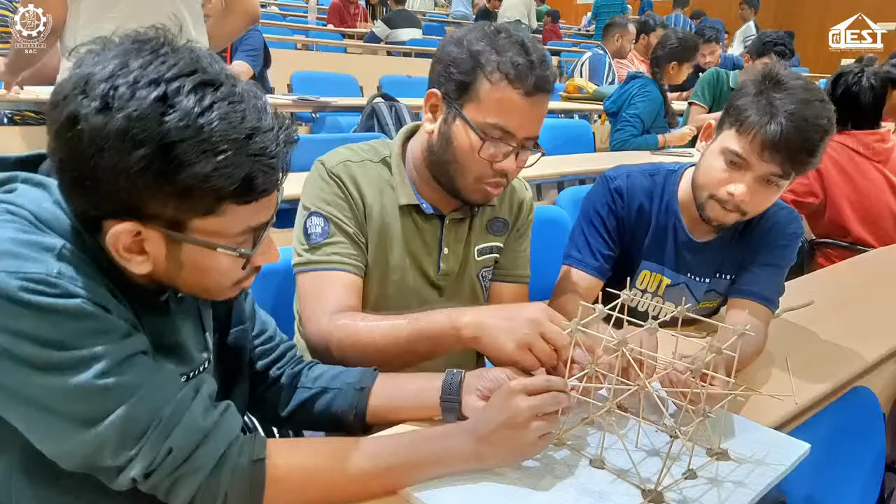Now let me introduce the guiding light of our club, the executive body of CEST. They aren't just leaders, they are compass, ever ready to navigate us through the challenges and victories that come our way. So let me introduce Mr. Bishwa Prakash Bahinipati, Vice President of CEST Club.

But our journey doesn't stop there. We present to you CIVI-NAR, an electrifying fusion of knowledge and connectivity. CIVI-NAR is not just an online webinar, it's a dynamic platform where the entire civil engineering community comes together. It's a stage where we dive deep into the most trailblazing topics of today and tomorrow, led by experts who have mastered in their respective domains.

As we carry forth our legacy, today's discussion delves deep into the intriguing topic, a digital based integrated approach for the preventive conservation of cultural heritage buildings. Before we embark on this journey, I would like to extend a warm welcome to our CEST Club advisor, Dr. Subhajit Mondal sir, who serves as an assistant professor in the Department of Civil Engineering at NIT Rourkela.

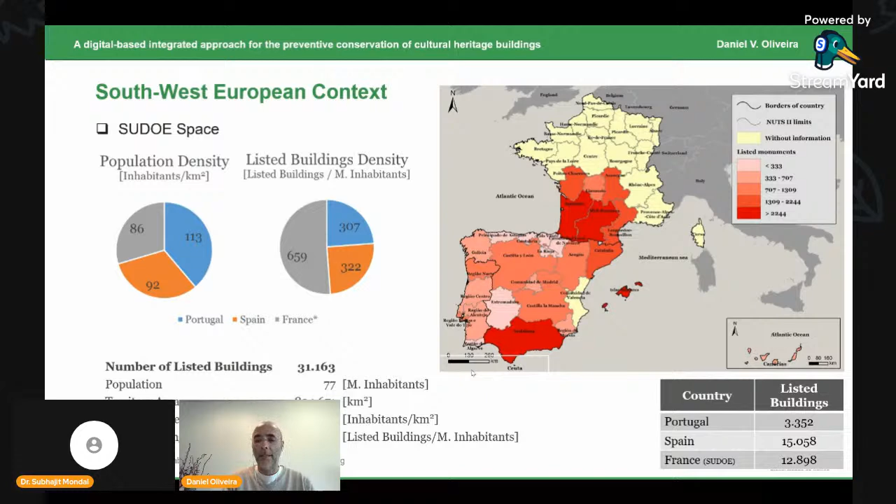So we built a consortium with 8 partners from different countries. We were the coordinators, and we worked on this project for 3 years. We call it the HeritageCare project - so we have to care for heritage. This was the message, and I will show you the main steps of the project.

My goal is to inspire you, so if this is a problem for your region, for your country, for your city, try to develop some kind of research activities that you can take further than we did. Take the good ideas and proceed with them, because this is really an important issue.

I just want to mention that we have partners from different sectors - this is really important. From the universities, research centers, the heritage managers from different countries, we have companies, private companies, and we have the owners of the buildings, like the church. They have a lot of buildings, especially churches, but with problems. And you have to understand that most of these owners do not have technical knowledge. For them, the conservation and preventive conservation and maintenance can be difficult because they don't have the technical knowledge - they don't know what they have to do when they suspect something can be a problem.

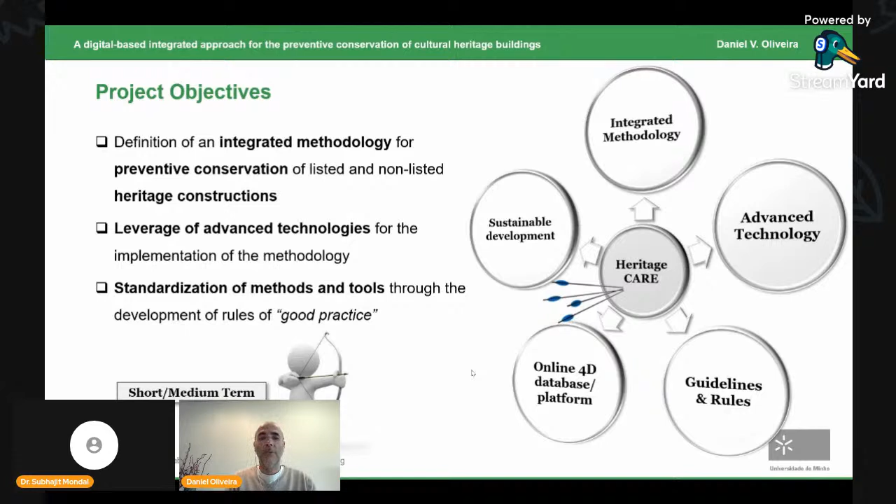This should be definitely integrated - you have to bring knowledge from different fields. And we have quite advanced technologies that should be used, should be considered to improve the quality of these tools. At the end, you should also define some rules of good practice so people can use it on a daily basis. This is really important - these were the goals of this project.

Of course, at the end, you also have to communicate to society - if we are researchers working at university, we have to communicate with society. Society needs to know what we are doing. We organized workshops and seminars to explain the purpose of our project and to explain that the things we are doing are important. We also organized a seminar at the end to train professionals on the use of these tools that I will show you.

You can develop fantastic tools, but if nobody understands them and cannot use them, they will not be used - it's useless. So you need to develop the tools so they are easy to use, and you should train people to use them. You need to put these things in your project.

How do you do this? We established 3 levels regarding the complexity, because you can do many things when you think about preventive conservation.

You can say, well, the basic thing is to do an inspection. So you go there, you check point by point, room by room, and then you write down a report with a damage survey.

This is nice, it's quite simple, and we've done this for several years now. But it's not enough, because if I go there and write a report, then if you go the following week, you will write a report different from mine, because we will be using different categorization of the damage.

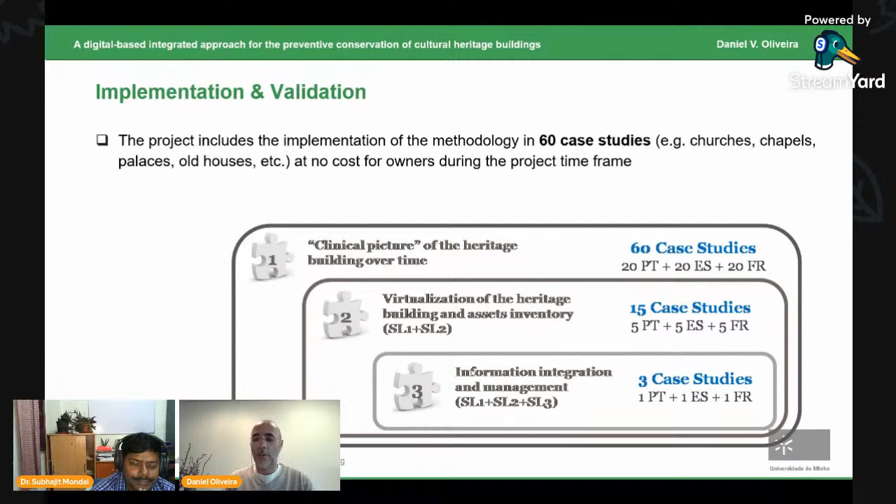And our most important case study was this palace that we have in Guimarães, nearby the University of Minho. So one of these days, if you come to the University of Minho in Guimarães, for sure you will visit this palace. This is a palace from the 15th century, and we put a lot of equipment here.

We did a lot of survey, laser scanning. So this was our case study. It was great because we had good collaboration with the owners, and we used this as our living lab, basically. Okay, so I will show you now.

What we did in the different service levels, the different levels of complexity. If you remember, level 1 was the simplest one. So you pay less if you want to think in terms of budget, so the cost is low.

You get the essential, basically. Then if you increase the cost, you get more, and of course you can get the maximum possible with the digital model. But then this is much more expensive, much more complex, and requires technicians with much more knowledge.

Okay, so level 1, our goal was in fact to have a very nice inspection report from the building. The goal was to identify the problems, the cause of the problems, why they are taking place, and then of course what to do to solve the problem. So we are really at the upstream part of this process. After this inspection, you have an architect, an engineer that will come and perform a design, or then the company, the contractor, that will solve the problem.

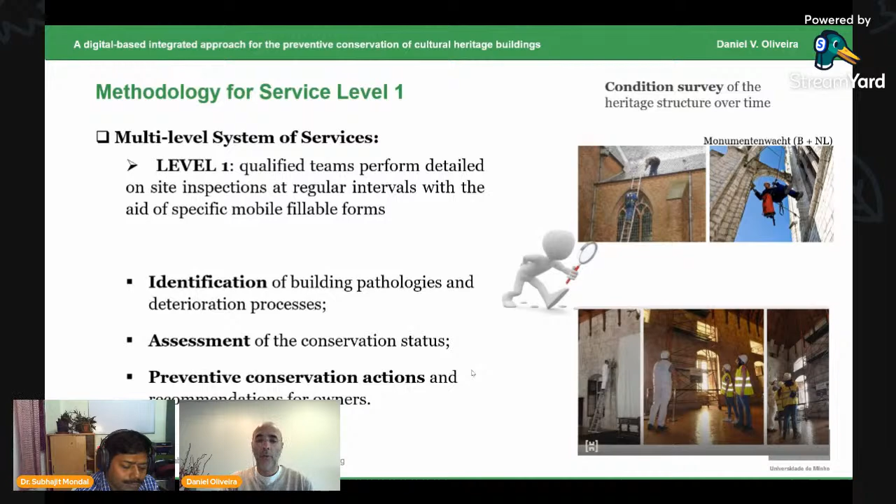So the goal was to have a nice report. Of course, for this you need a lot of things, I mean the equipment, I think I will skip this. I just want to comment that we performed our inspection using a tablet.

We started the first inspection in 2017, 2018, so six years ago already. Nowadays everybody has a tablet, but in those times it was not so common, though it was the minimum that you can do. You cannot take a sheet of paper and perform the inspection, this doesn't make any sense nowadays. That's why I was saying that we have to bring the technology to this.

And this is done offline, you don't have to be online for this. In the office, you can download all the information you need from the web platform to the tablet, and then in situ in the building you can use the tablet to fill in your inspection sheet form. You can fill it, take pictures, record audios, videos, whatever you think is necessary. Everything will be stored in the tablet, and then when you go back to the office you can upload all this information to the web platform.

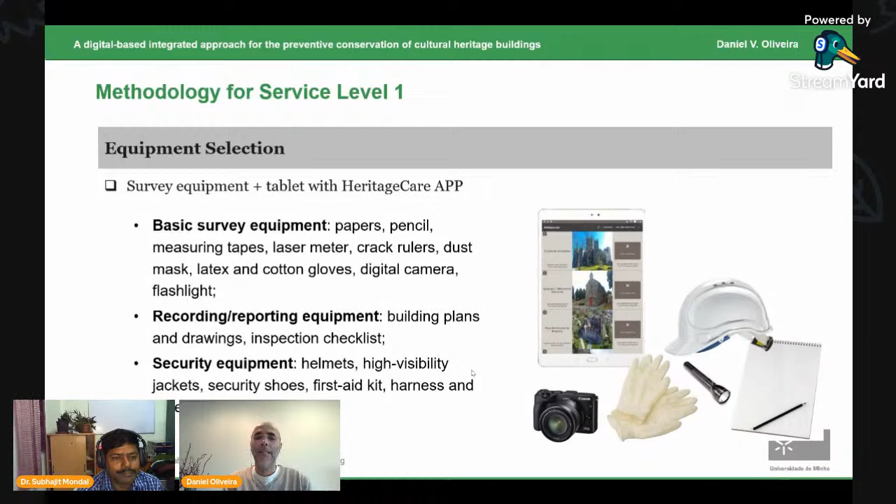So all this information will be recorded and associated to the inspection of the buildings. Everything that is information will be there, and you can access it anytime. This is the advantage of having everything integrated in a single platform. You can also produce damage maps.

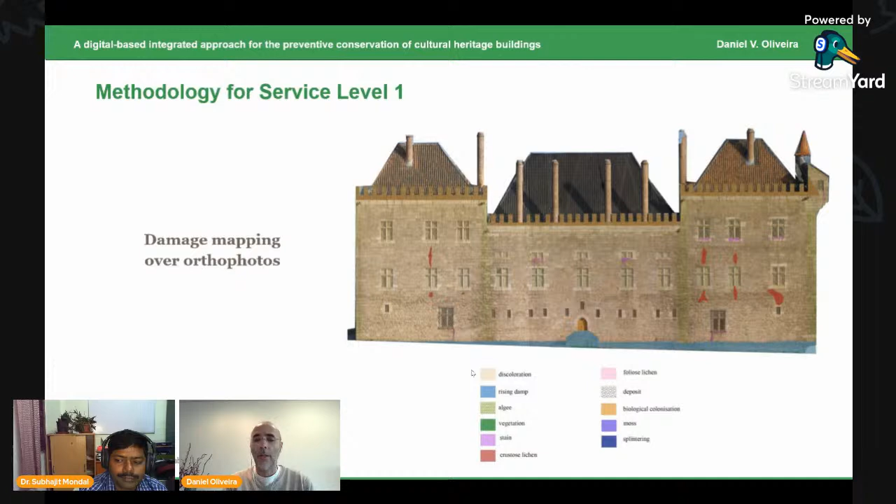This is really important. You have to define a category of damage categorizations, so everybody can use the same categorization. This is a major issue.

I just want to show how we did the inspection. So we start from the top to the bottom and from outside to inside, and we did this in all the 60 buildings, so we could not forget any point. In this case, we defined 11 categories, and you have to go one by one in each building and check what you have.

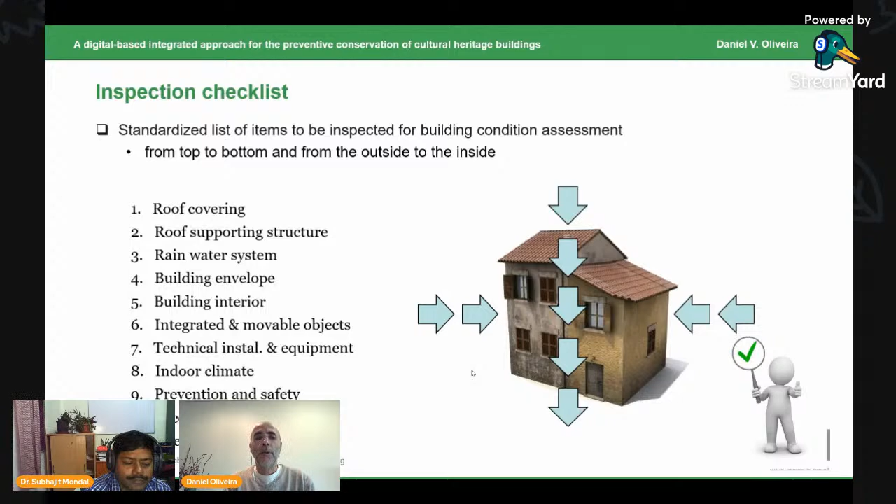Just to give you an example, these 4 groups with the 11 categories, you have to go one by one and define. For instance, if you go inside the building, you have to check section 5. In this 5, you have to inspect all these subsections. So this is really important.

Of course, there are some areas you may not be able to access, but you have to write this in the report that access was not possible, if that's the case.

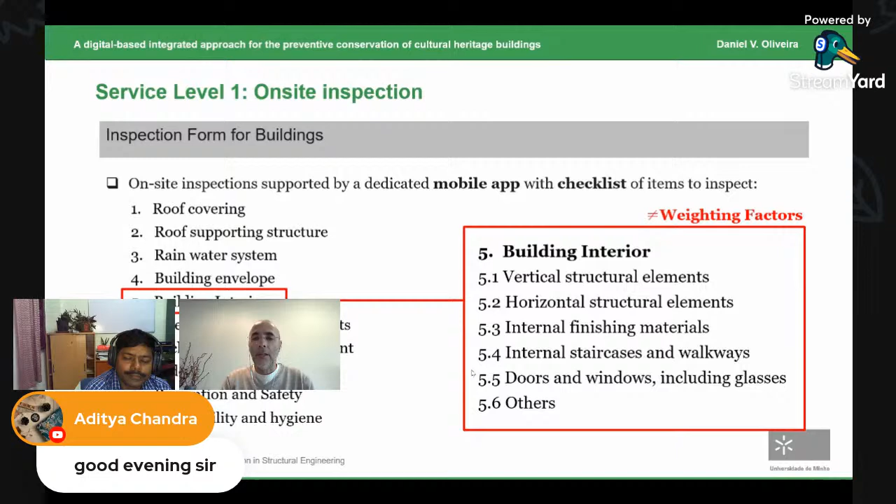And then you register damage there. Of course, the damage has different levels of importance, so we assigned weighting factors to the severity of the damage. This was very difficult to calibrate, I have to say.

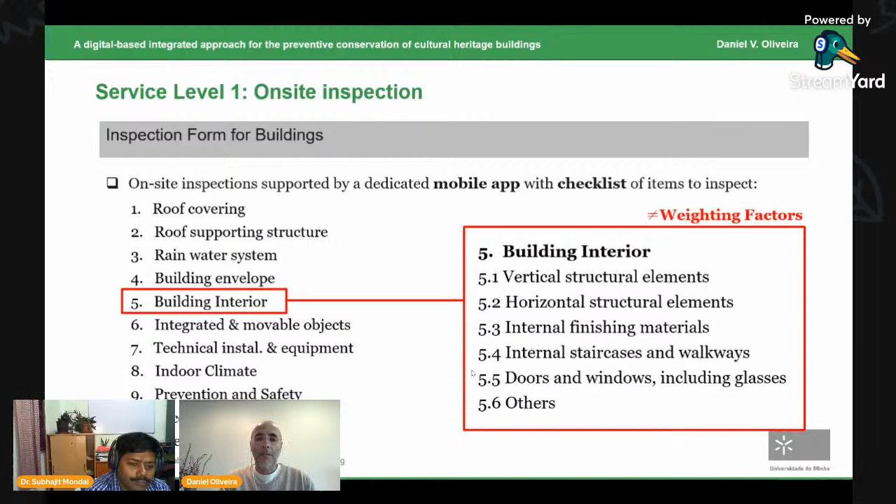Because moisture is one thing, and a huge structural crack is another thing, and the importance is totally different. So we established some weighting factors. They are variable values, so you have to adjust from building to building, but it is important to state that your damage does not have the same importance. This is really important.

Another type that I'm showing, these were the points that all inspectors had to look at. This is really important because you have to define this structure. Ideally, the report on the damage status should be the same no matter the inspector. You can send 2 or 3 different inspectors and they should be able to obtain the same result. This is great, of course it doesn't happen like this all the time, but this was a major objective.

So, to have a report that is independent from the expertise of the inspector. Of course, the inspector needs some training, and it will require a minimum expertise for sure. But different inspectors going on different days should be able to obtain the same result, this is really important.

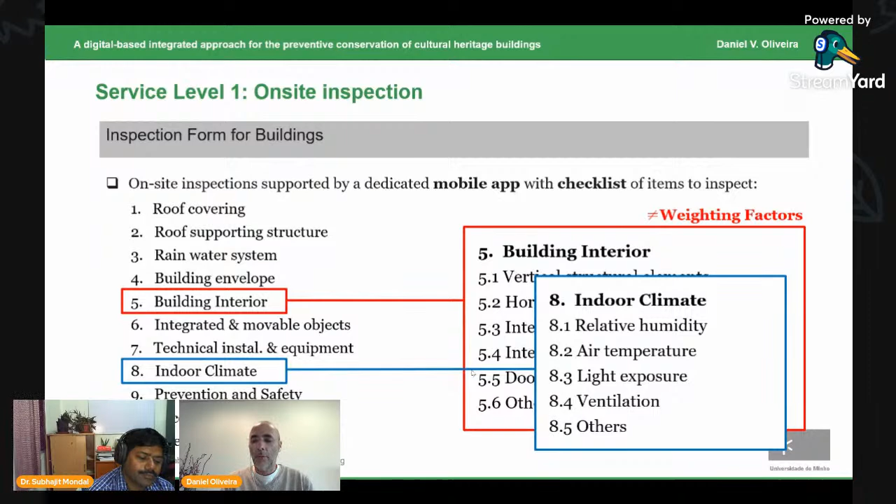So this is the part of the damage atlas we defined for the building. We created 11 categories, then for each category we defined subcategories, and then sub-subcategories. This is really important because this was really a major aspect.

If you define just a few categories, it's too confused. But if you define too many, you are not able to locate your damage, because it can be in two categories at the same time, and this is not possible. So it's really difficult to be objective, but anyway, this was our final proposal.

As I told you, we tested on dozens of buildings, and after all these tests we ended up with this stable categorization. You enter the platform as an inspector. Owners can also enter the platform, but they will not see the same thing. As inspector you can check all the information, while owners will check only the non-technical information, because they are not able to understand technical information.

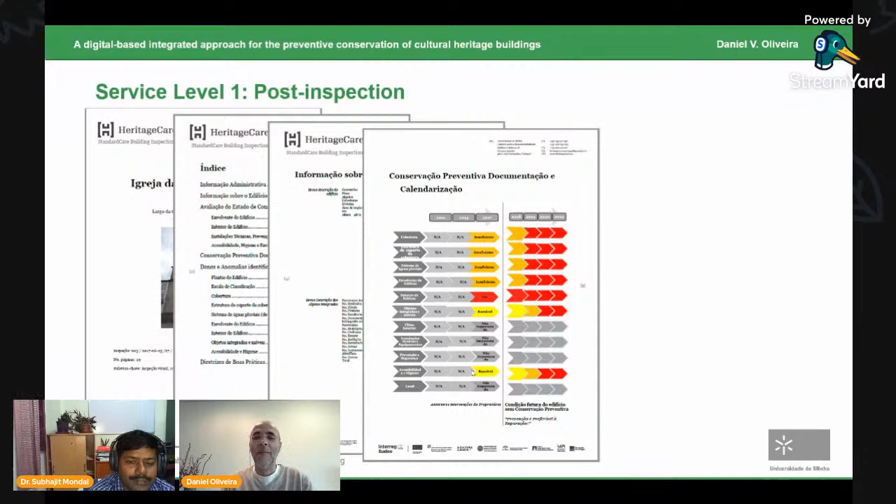So how do we communicate with them, how do we give them the information? We have to use colors. It's very basic: red, yellow, green. If they see these colors, they definitely understand the problem. If it's green, they know for sure it's not a big problem.

You have to do a new inspection maybe after 2 or 3 years. But if it's red, they know they have a problem, and they know they have to act. Maybe they don't fully understand the problem, but they have to act, and they will hire an engineer to solve it based on the information they receive from this inspection.

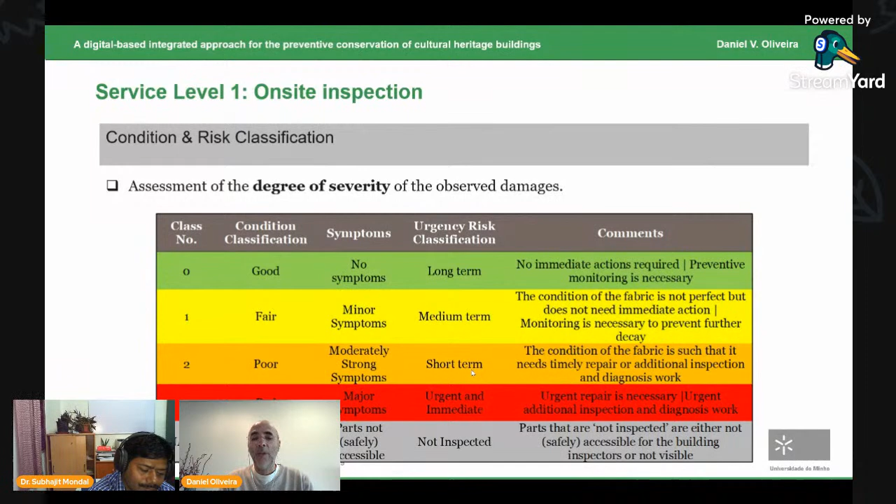This works very well when you have to communicate technical information to non-technical people. This is a problem we don't face at university because everybody understands, but when you are interacting with society, you need to have this care.

So at the end you have something like this, with colors, and then we talk about the causes, the consequences, and some recommendations that people can start looking at to solve their problems. This was really nice.

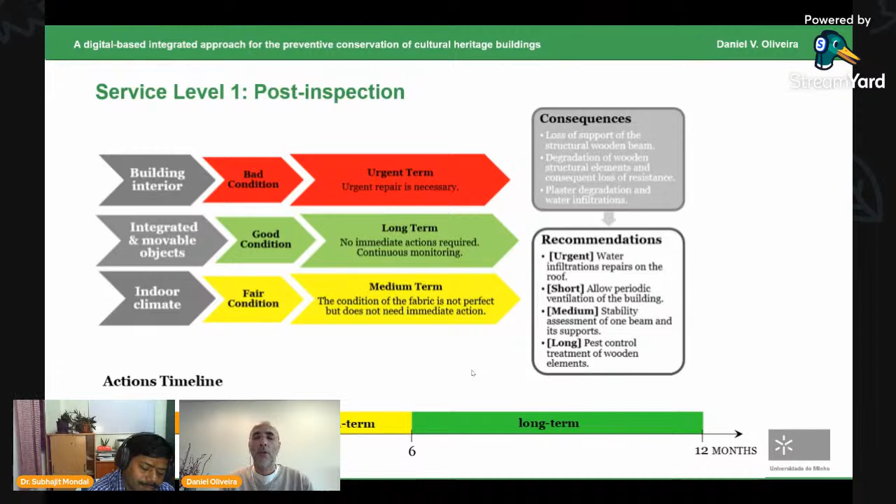At the end, basically you have a standardized report. As I said before, if you have two inspectors going there at 2 different moments, they will obtain basically the same result. Then you create automatically in the platform the non-technical report for the owners, who then have the information to start solving their problems. They have to hire technical people to help them solve the problem.

So the goal of the project is not to solve the problem, it's to detect the problem, understand the causes, and then alert people about it, doing this on a regular basis.

Level 2 is for cases with more severe problems, more serious problems, more other needs, and of course more budget. In this case, level 2 takes the inspection from level 1 and adds additional layers.

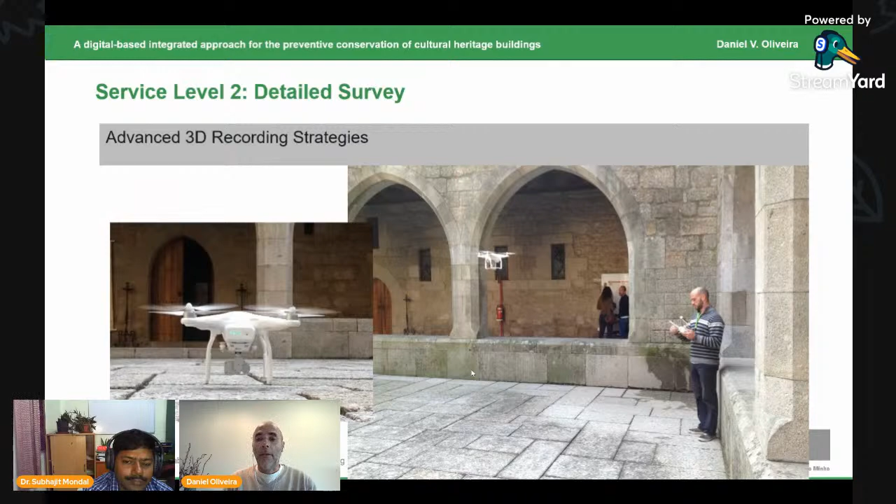The additional layers can be, for instance, a basic digitalization with photogrammetric models, with laser scanning, and then you obtain a point cloud model. All this can be produced. You can produce a very basic model and use it to perform some technical tools.

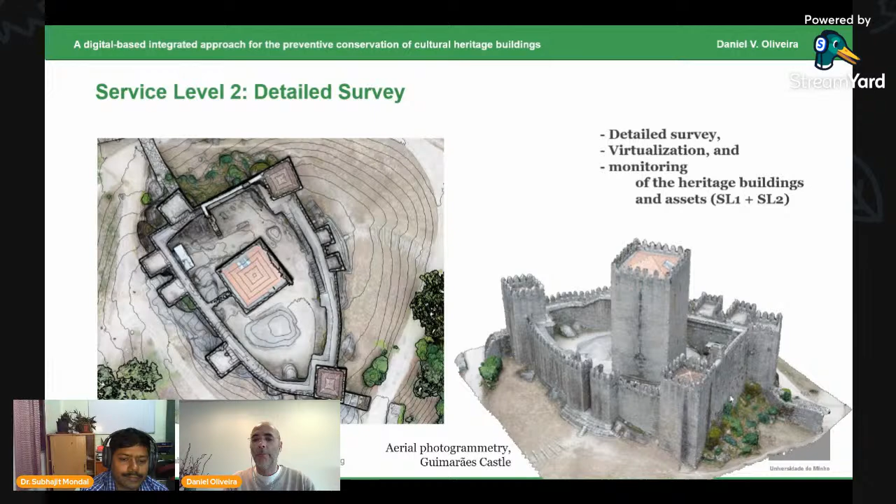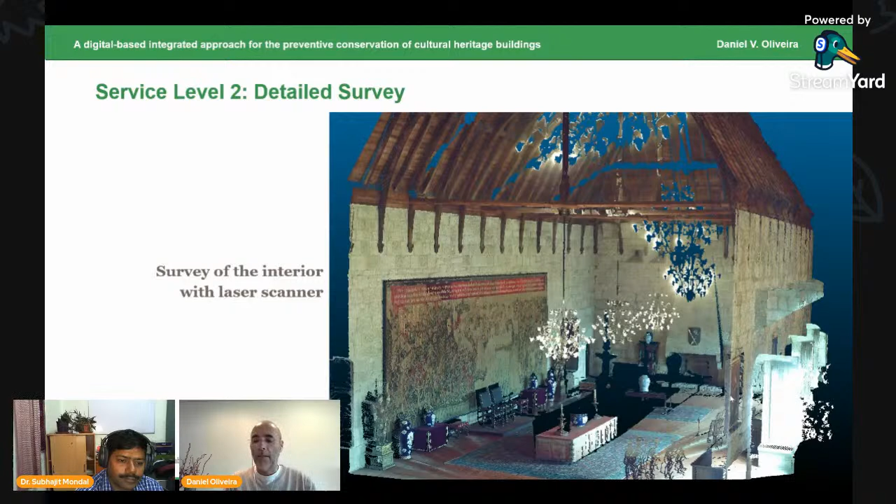This is a castle close to the university, so we did this as an application case study. This was done with laser scanning, so you can create this model and then create hotspots in it, navigating virtually through the model and accessing the information through hotspots instead of entering the platform. So all the information from the report can be put into these basic digital models. I'll show later.

If you want to do it in a cheaper way, you can take panoramic pictures, 360 pictures, which can also be used for this purpose.

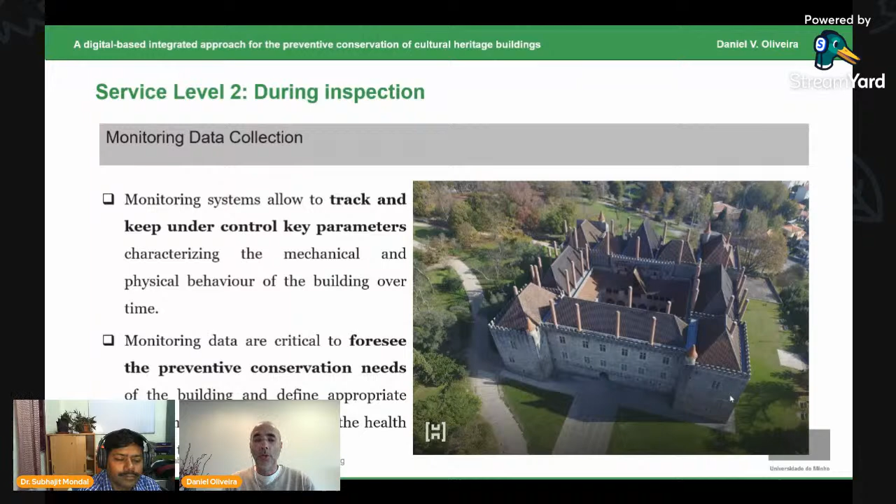Another layer you can add to service 2 is monitoring. You need some basic information, imagine about temperature, humidity, or luminosity. This is our case study, this palace. Part of the palace is a museum, so you need this information. It's really critical to have information about luminosity, CO2, tilting of the walls - all these physical and mechanical parameters are very important.

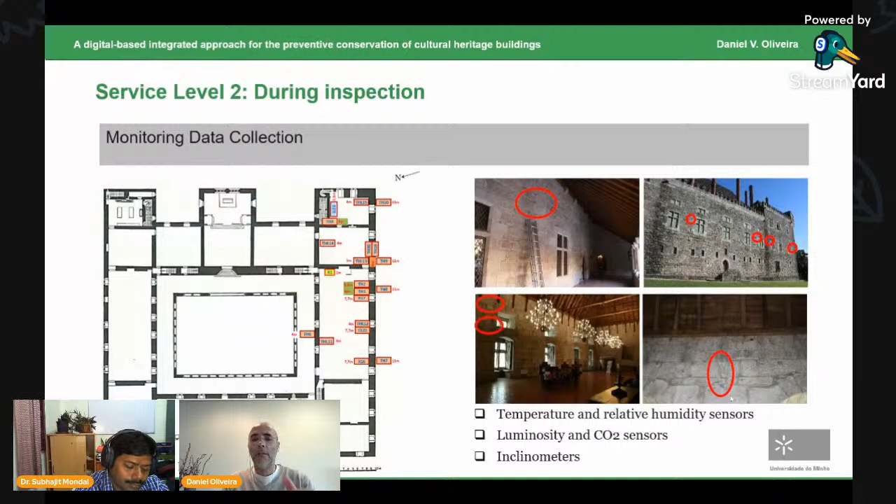So we installed several equipment in this palace - this is just the location, the name. We installed it in different ways, and the point is you can access this information directly on the model, on the digital model. I'll show the way we did it, but we did it in a very simple way, to limit the complexity and the costs.

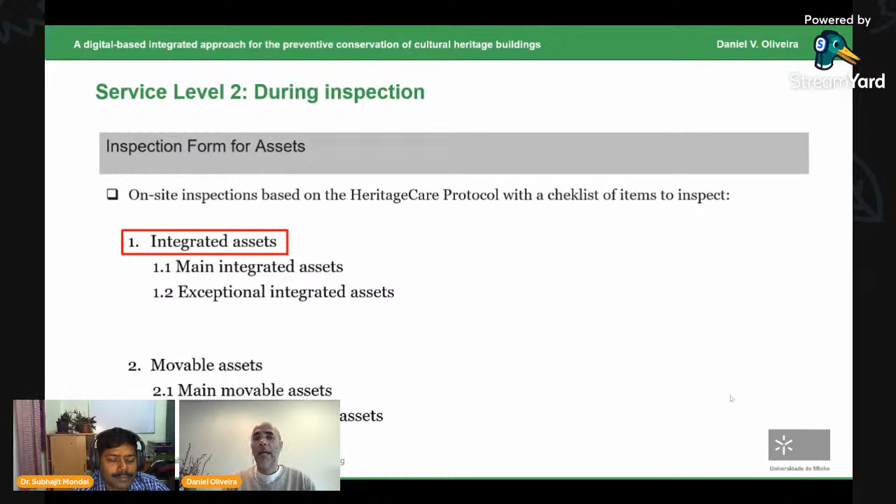Finally, the last layer is the inspection of the assets. We're talking about a museum - you have furniture, paintings, a lot of important things, ceramics, everything that is really important. We produced a damage catalog also for these assets, with the help of people used to working on this - this is not by engineers. You have conservators and architects and people that care about the assets. This was also important to perform inspection not only on the building, that was level 1, but now in level 2, also on the assets that most buildings contain.

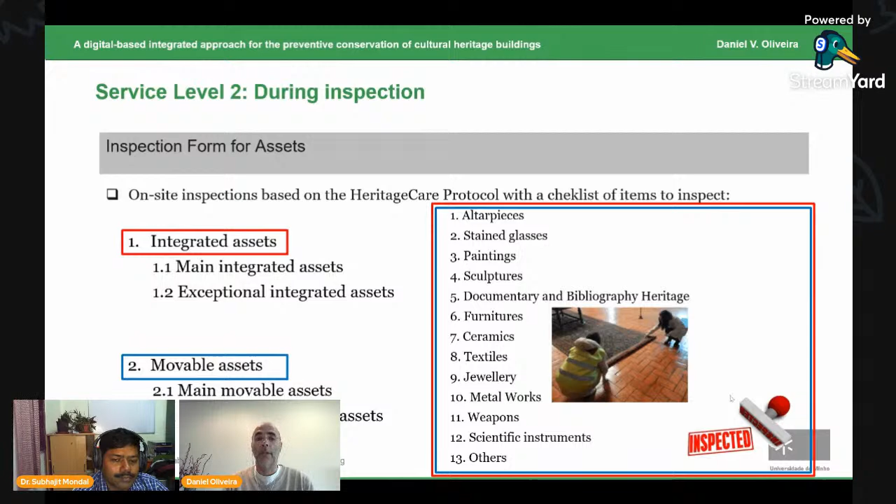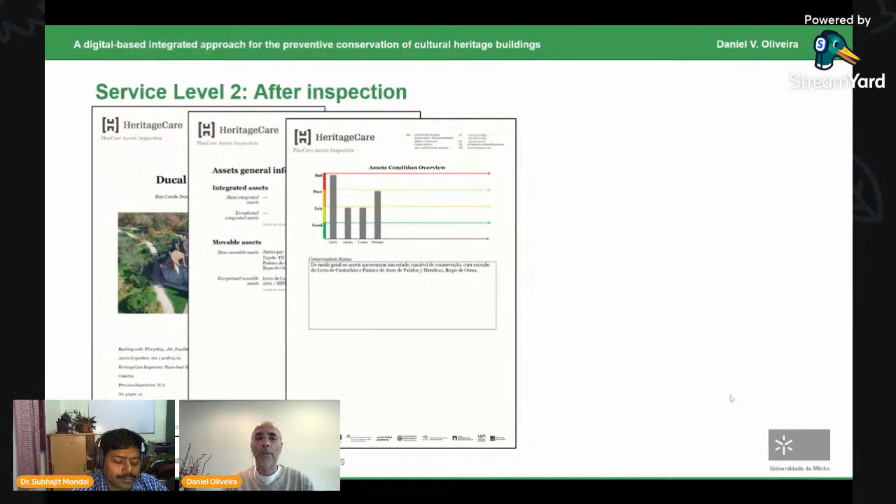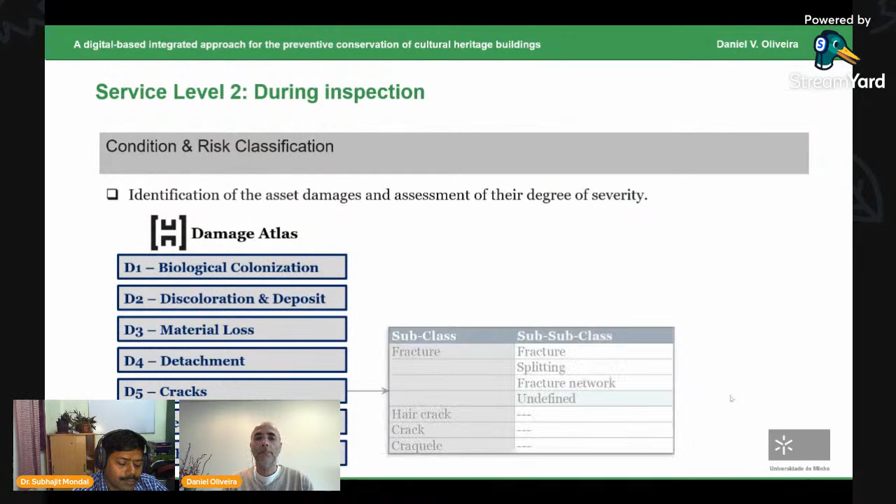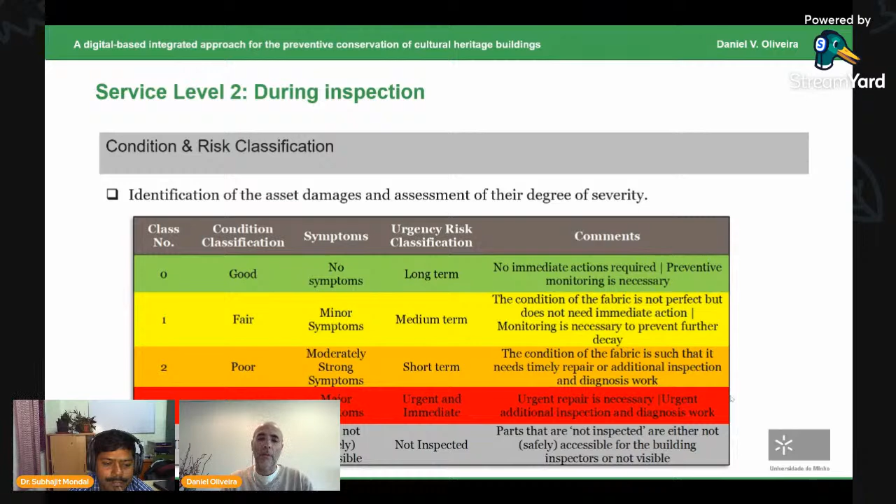This is the form for the assets, and in the same way we produce a report. The platform automatically produces a report regarding the assets, the same way as for the building itself - again with colors. In this case, normally the owner has more knowledge, because he's running a museum. He has some knowledge, not like owners of a house who don't know very well about technical things.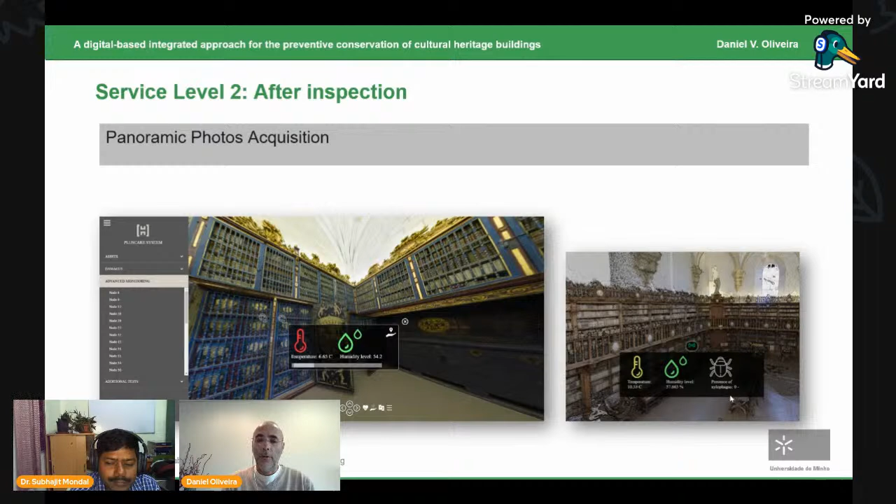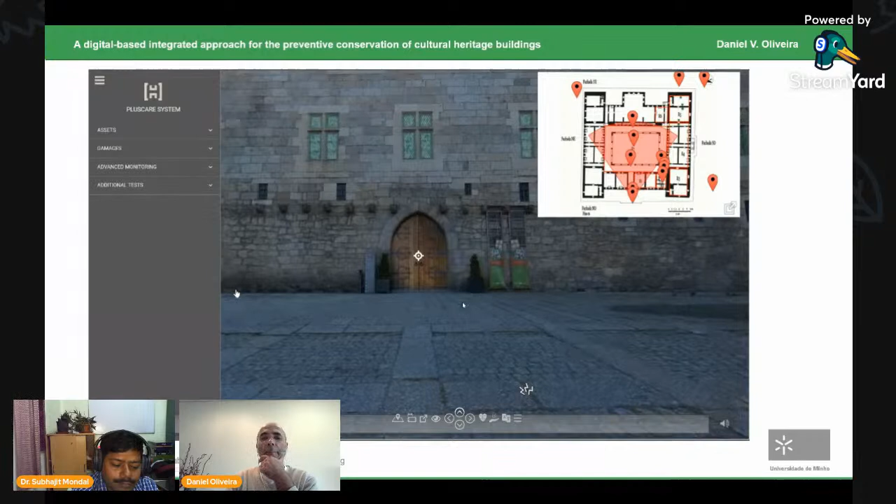This is just a picture, a print screen of what I was talking about before. You can have hotspots on your virtual model that give you access to the information - for monitoring, or from the inspection report. I'll show you an application we did, a short video. This is the palace, a very basic virtual model we made based on 360 pictures. All these are hotspots that give you access to the report.

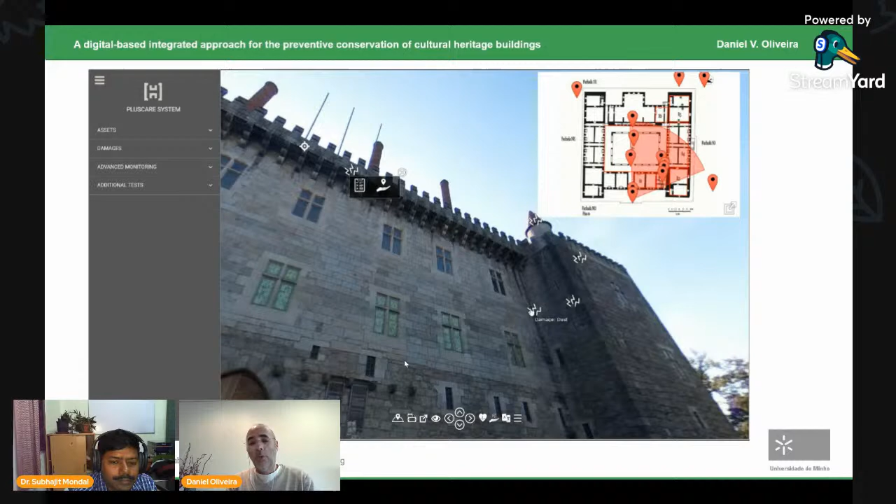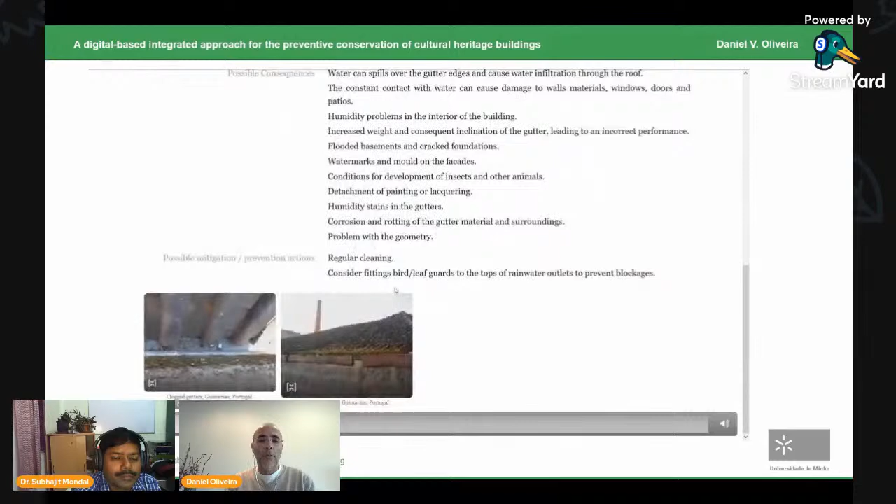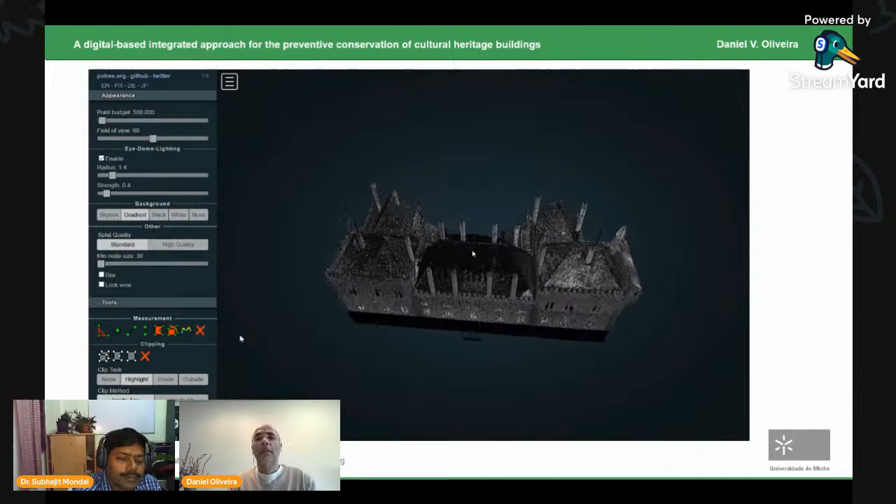For instance, this can give you access to information from the monitoring system, or access to the report. But you can also access - I'll move this further - basically this is a technical tour into the building, reaching different types of information. All the information you collect from the building can be put here, and can be accessed in a very easy and cheap way.

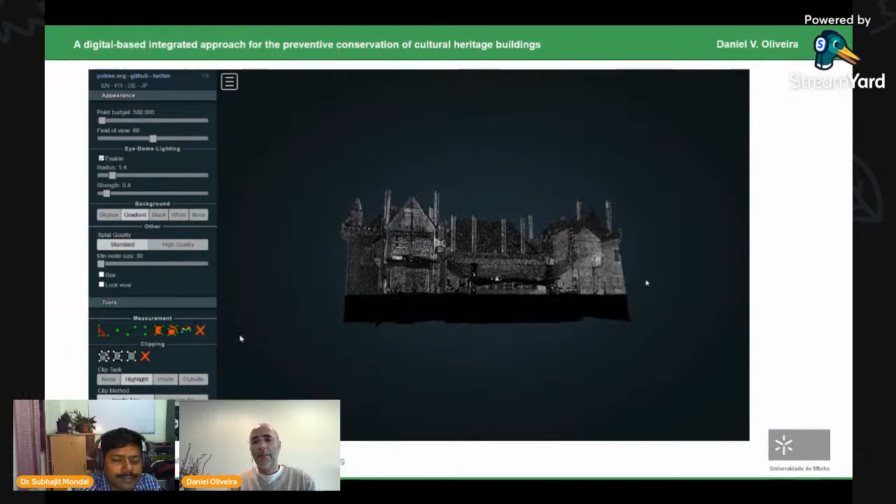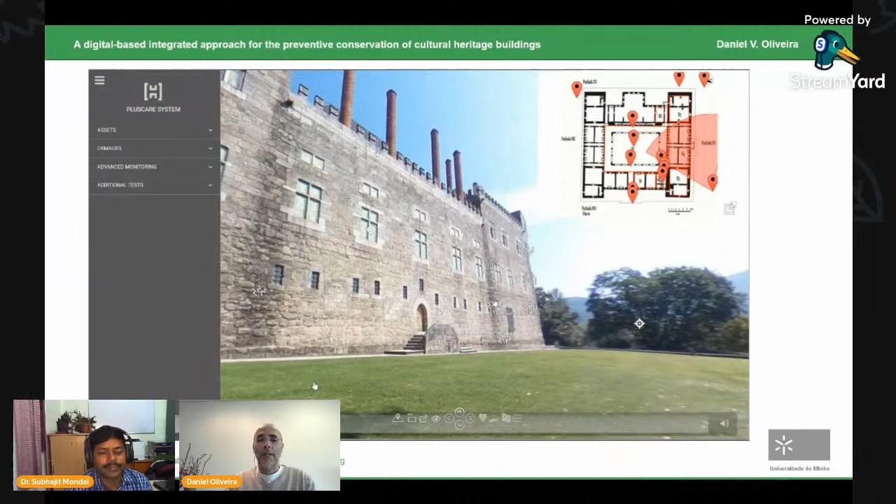Of course, with a BIM model you can do much more - you can go much deeper, but then the expertise and the cost is also much higher.

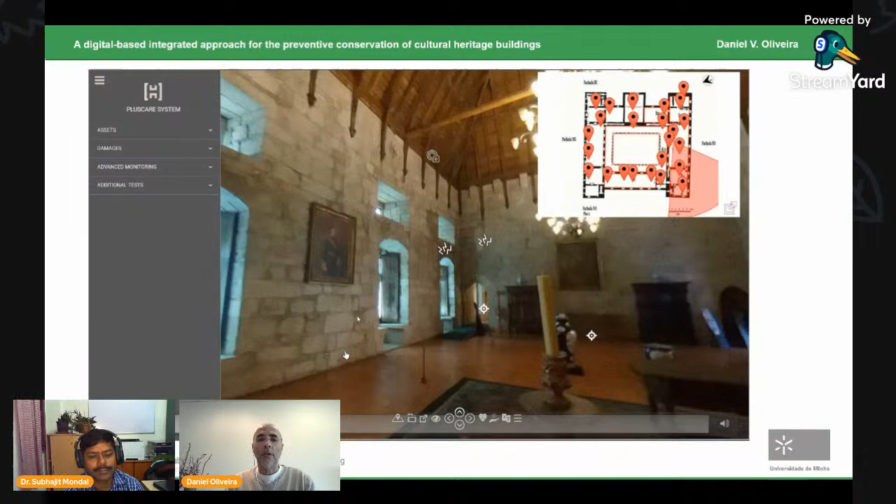These are hotspots regarding the damage we found. But you see here, this is a sensor - what you're seeing now, we have a tilt meter on the walls. We have loggers, data loggers for humidity and for temperature.

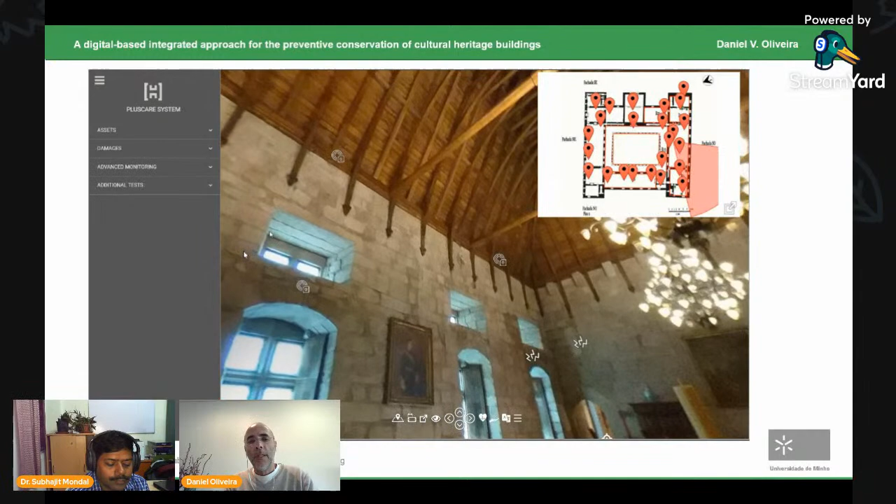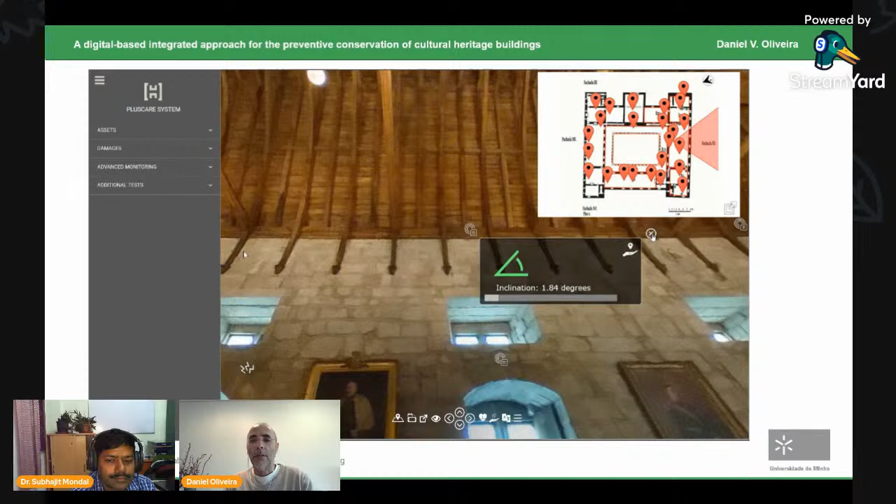What's important is, again, the owner doesn't care about the value of the relative humidity - he just wants to understand if it's okay or not okay. So what we did, you can see here the tilt meter measuring the current inclination of the wall - it needs to show if the value is acceptable or not.

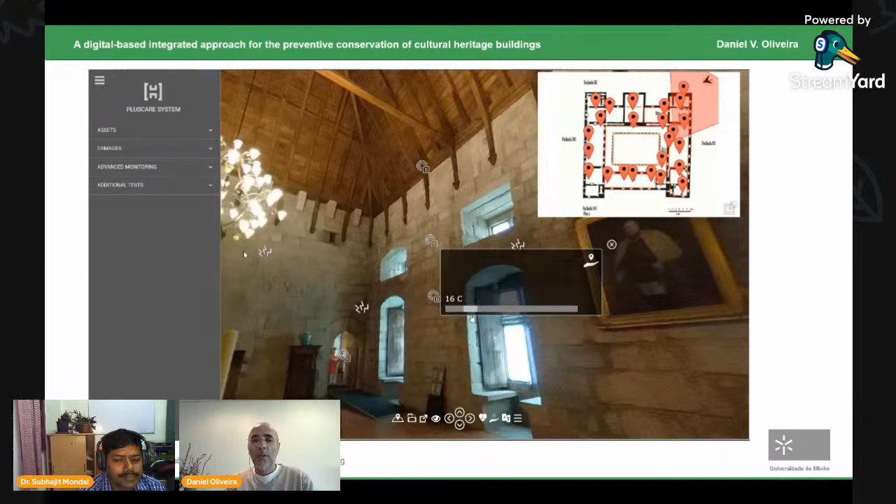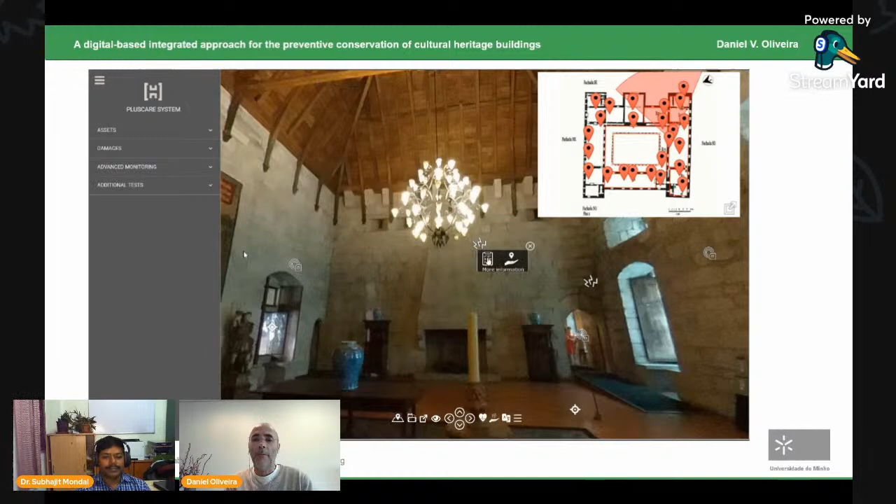Again, we used colors here - green is a range of values that's acceptable, yellow means you have to be careful, and red means it's really in danger, this parameter is too high or wrong, not acceptable. It means you have to do something about it. So you don't need much expertise to understand the information you're looking at.

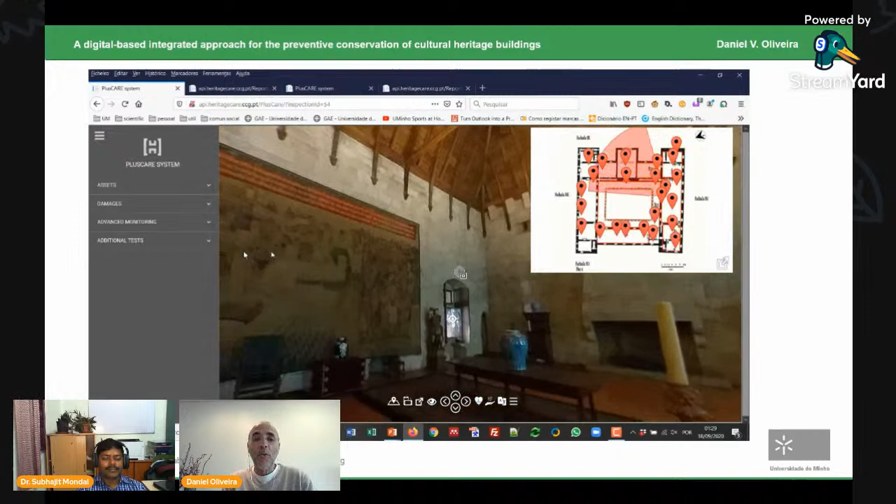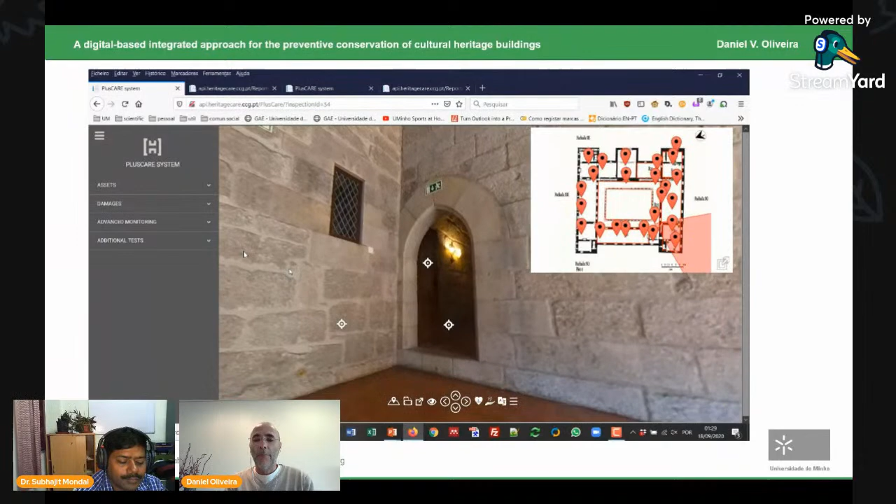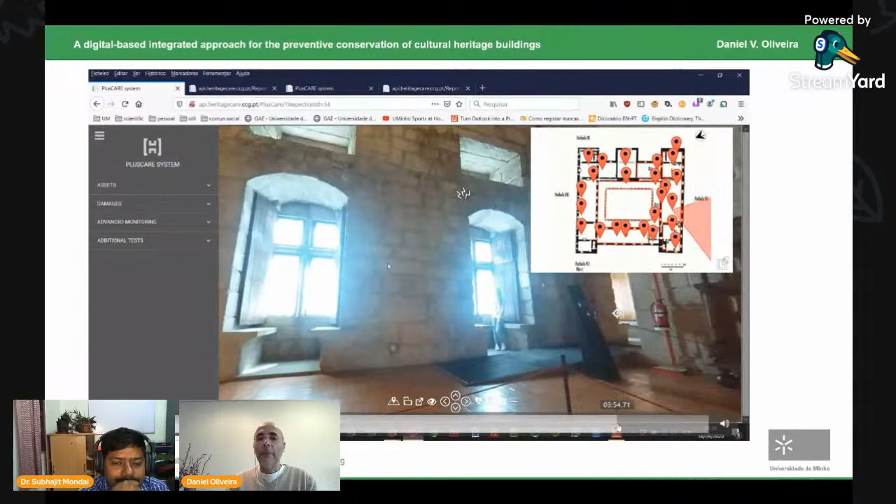This is really important because in practice, this is supposed to be used by the owner, not by us - we are the inspectors, we produce these tools, we won't be using them. The owner is the person who will use this, and should be able to understand this information. So you have to combine precise technical information with the owner's ability to understand it - this is really challenging for us. I think you got the idea - everything that is information can, in fact, be put into this very basic virtual model.

Okay, I will move then.

Of course, if you have a very important building, and if you have the budget for that, you can go further. Instead of using basic virtualization based on the photogrammetric model or the 360 pictures, you can perform laser scanning and create a BIM model of your case study, of your building. And if you have a BIM model, everything that is information can be stored and managed. So this is, in fact, the ultimate goal.

As engineers, this is our ultimate goal. This is really great, but you cannot forget the previous two levels, the simplest ones, because this also depends on the budget you have available. This is great, but only if you have the budget, and that may happen maybe in 10% of the cases. So the remaining 90%, you have to use level 1 and level 2. They must exist for those situations, for the majority of situations.

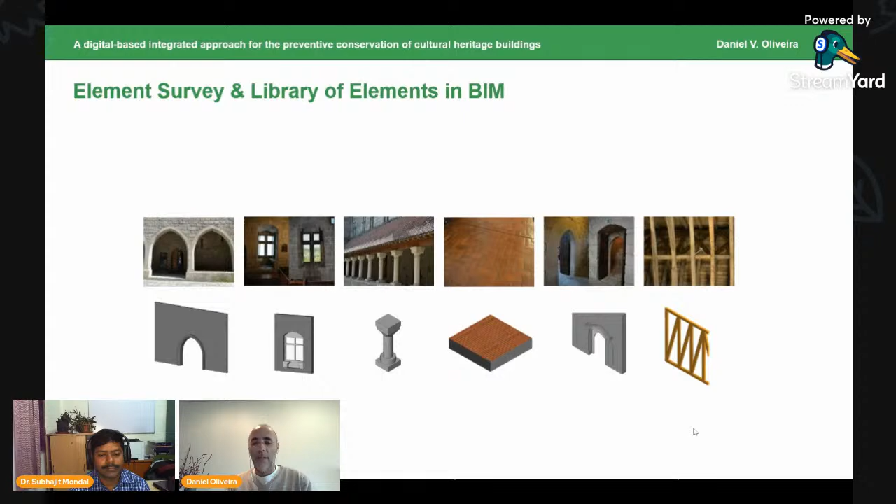I just want to highlight that historical buildings pose quite important challenges, because for modern buildings it's really simple - you can find most of these structural elements already available. But for historical buildings you have to create them. So this is what we did, and then we created the model and started attaching the damage based on the inspection.

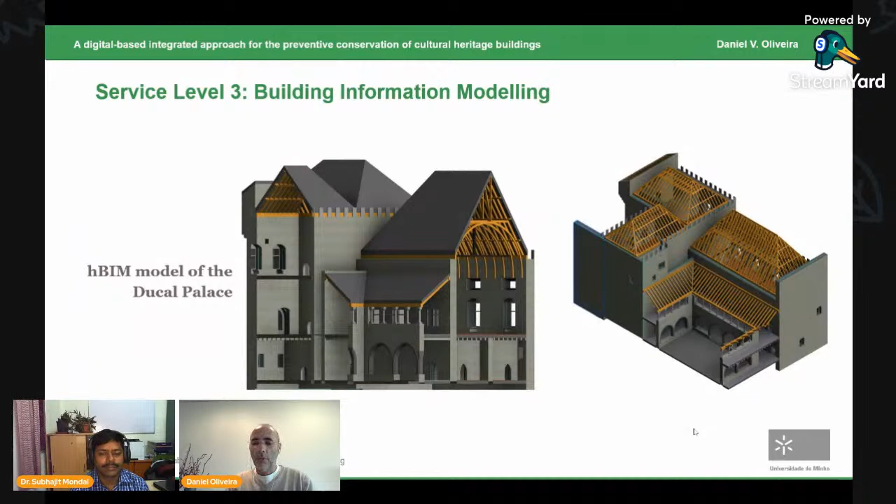As this is just the model, I want to show the work we had to do. Of course, for this you need partners with very high technological skills, because this requires a lot of specific knowledge. I just want to show this video of the work we did with colleagues from the graphic computation center that was our partner. So first we did this.

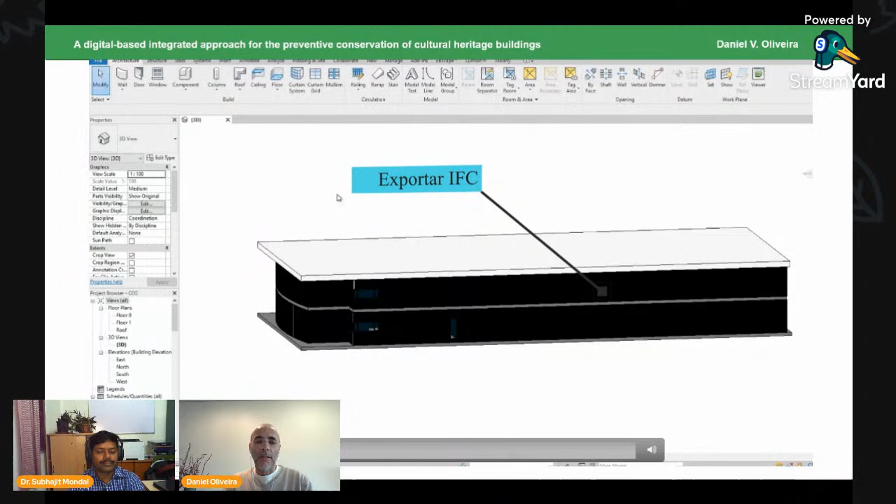Sorry, some of the videos are in Portuguese, but that's not too important for understanding. So first we did this in a controlled environment - it's really important that you control the place. So we did this in our office, testing different things there.

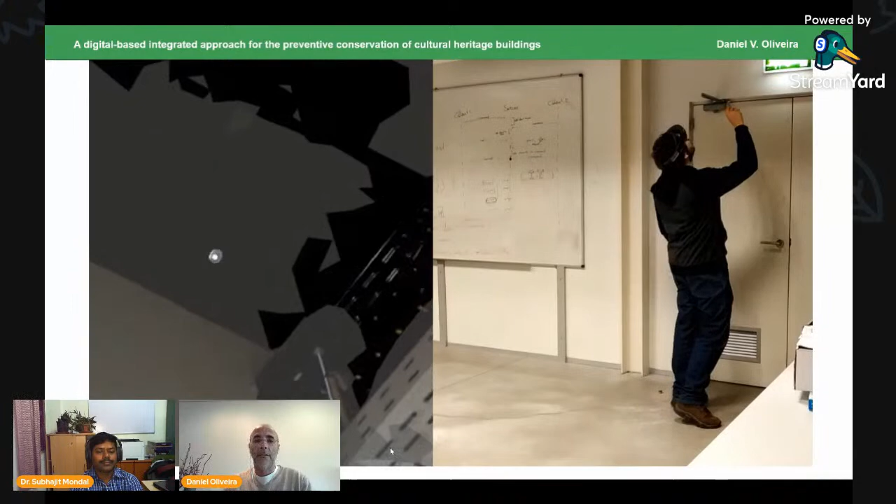The ultimate goal was to perform the inspection using augmented reality, so for that we don't need the tablet - we can access the damage atlas through the smart glasses. So everything could be accessed; we could access the platform through the glasses, so there's no more need for the tablets.

I'm moving - so you can see the inspection assessing the damage. In this case it's moisture, and we attach it to the building. So we moved from the office finally to the building.

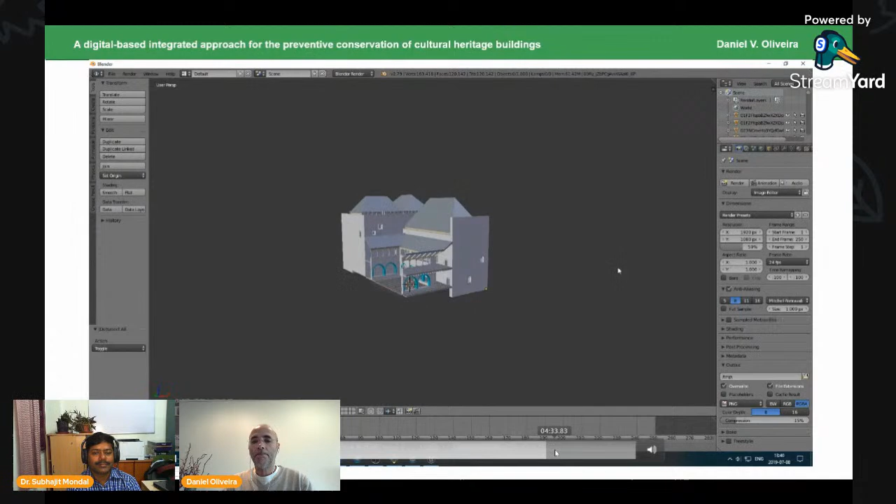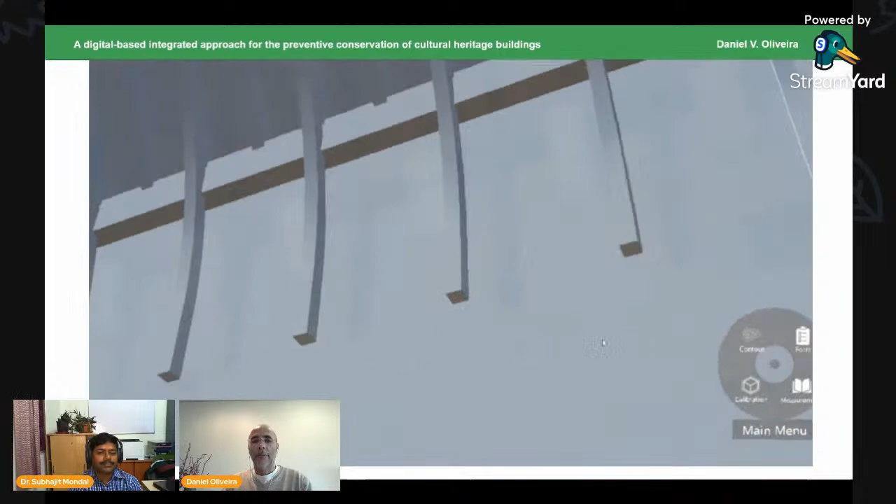And then we did this on a room, because it was really hard to perform the entire project, given time constraints. Basically you have a project, you have to run a project, and it needs to start and finish on time. So we did this on a room, on the big room, just to demonstrate that this technology can in fact be used for inspection of buildings.

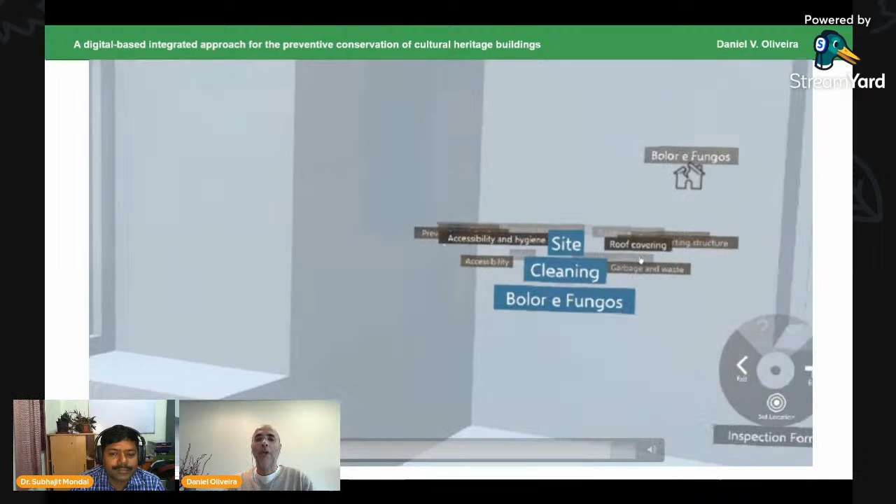Okay, quite expensive still, but it is possible. I believe in some years, in the years to come, this will be quite common. So maybe for you, when you become professionals, maybe you'll do this type of inspections. But it's still not that much common, though it is possible. The goal was to show that this is possible.

Well, to conclude, we had these three different levels of complexity, of cost, and of expertise that should be selected based on the availability and needs from the owner. Our keywords are diagnosis, so we need to understand what happened in the past. Then we have monitoring, if there is money for this. This is level 2, to understand what is happening, and eventually to predict what will happen with some prediction models.

And then when you put level 3, then you have management. The management will give you the possibility to manage all the information. This is really important, because if you want to do management of information, then you need to go for level 3. That is the introduction of the BIM model.

And the final message is, of course, prevention is much better than cure. With prevention, you can act on a regular basis and your costs are really small compared to a remedial intervention that requires a lot of money, and in some cases it may cause some losses regarding the heritage value, the authenticity and heritage value that we should avoid at any cost.